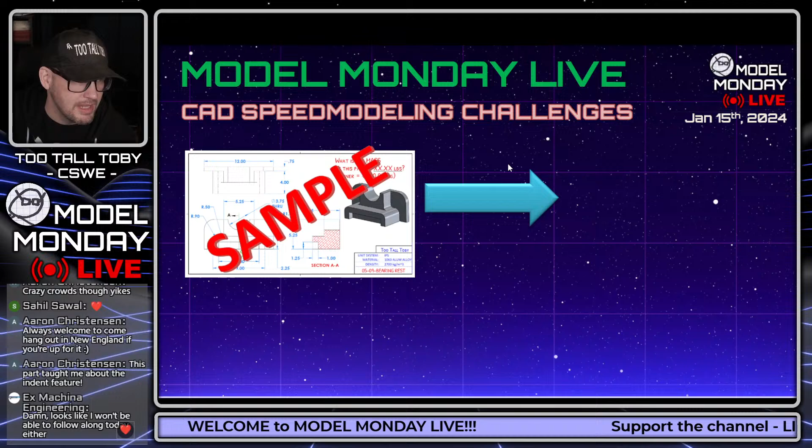So here we go, let's get into it. CAD speed modeling challenges: we're going to show you a 2D print, and we're going to challenge you to turn that 2D print into a 3D model. You're going to calculate the mass of that model, and enter that mass directly into the YouTube chat. You can use any CAD system you want - SolidWorks, Onshape, Alibre, IronCAD, any CAD system you want - to take this 2D print, turn it into a 3D model, and calculate the mass. I know that we're a little bit light today.

It's a holiday here in the United States, so we're a little bit light as far as number of live attendees for this live stream today. But the people who are here are heavy hitters. So if you're in the chat today and you're trying this one, be ready for some challenges, because we have some of the fastest people in the world in the chat with us here today.

So the basic rules are that you can use any CAD package, that you're going to use the specified precision, and the first correct answer in the chat will be declared the winner. Here are the unit systems that we use on Model Monday Live.

So if you're here for the first time, let us know. Sahil in the chat is saying, I use Siemens NX. Very nice, very nice. Welcome, using Siemens NX - it's great to see a little bit of an exotic CAD system in here. And let's get into it here.

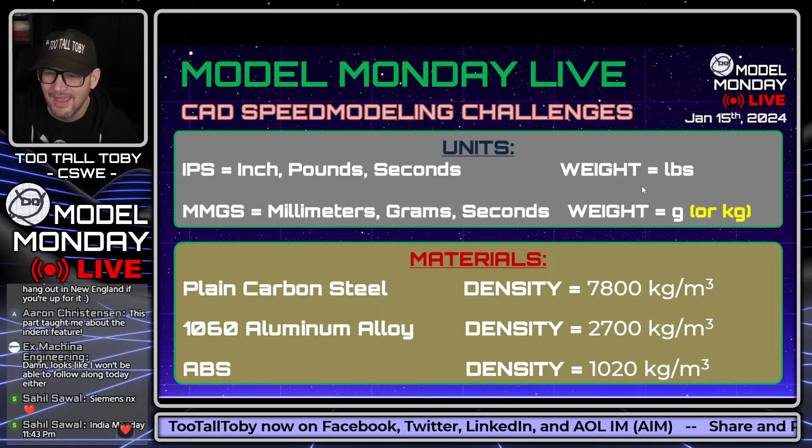Advanced rules: occasionally I'll make some mistakes, and the Ivan exploit is permitted. And Ricardo Jean is in the chat - welcome, Ricardo, perfect timing, we are about to get rolling here.

So here we go. This very first challenge is gonna go live as soon as I show the print. You are live, and you are challenged to turn this into a 3D model. Here we go, in 3, 2, 1, go. What is the mass of this part in XXX grams? The tolerance is plus or minus 1 gram. This part comes from the 2023 tournament - it was 23-T-04, corner T, a little corner part that you might use. This part you can see is in MMGS, made of 1060 alloy.

This is one that I think is a cool looking part. I don't think we've had this one as a challenge model or practice model in Model Monday Live yet. And so, as always, what we'll do with this model is make kind of a modified version, and then roll that out as a practice model as well, as a standalone video. But what is the mass of this part in XXX grams? That is your challenge today - try and take this 2D print and turn it into a 3D model.

I'll give you guys just another minute here to grab a screen capture of that. I'm going to take a sip of my delicious coffee. We actually ran out of our regular blended coffee today, so I'm drinking the backup stuff - not quite as delicious, but it gets the job done.

What is the mass of this part in XXX grams? The tolerance is plus or minus 1 gram. So give this a try - take a screen capture, put it over on your second monitor, start modeling this thing up. This is probably like a tier 3 on a scale of 1 through 10. This is like a tier 3 model here.

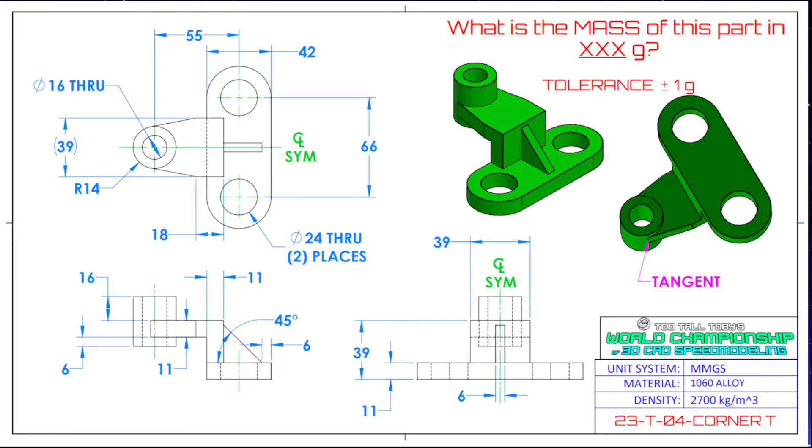We're going to flip back to the presentation here and keep on rolling, talking about what's going on in the world of TooTallToby. As I mentioned at the onset, the 2024 Spring Open is currently live for registration and qualification, and that window of opportunity will end in just about a week.

So if you go to TooTallToby.com and go to the section that says Tournaments, 2024 Spring Open, or TooTallToby.com/spring, you can see this is the page where you can register. There are lots and lots of people here who have submitted a qualifying run, looks like about 20 people. So what we're going to do is look at all of these runs and reach out to the top 16 people on this board.

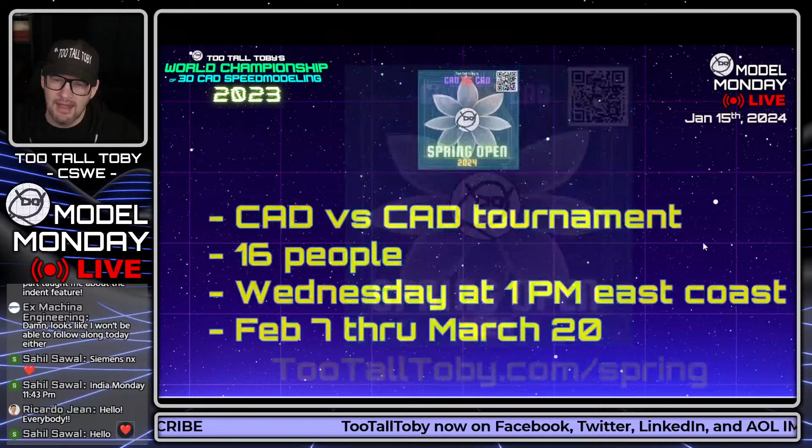We're going to say, hey, would you like to compete in the upcoming tournament, the Spring Open? The details here are that the tournament is going to be CAD versus CAD, 1 versus 1, same format that we use for the World Championship. It's going to be 16 people, running on Wednesdays at 1 p.m. East Coast, with tournament dates every Wednesday, February 7th through March 20th.

I think there's like one week where we skip in there, but the semifinals and finals are going to run on March 20th, and it's going to live stream at 1 p.m. on Wednesdays, East Coast time.

So if it turns out that we reach out to some of these people who qualified for the tournament and they say they actually can't do it on Wednesdays, or if we run into a scheduling conflict where they just can't do the tournament, then we're going to go on to the next people in the list.

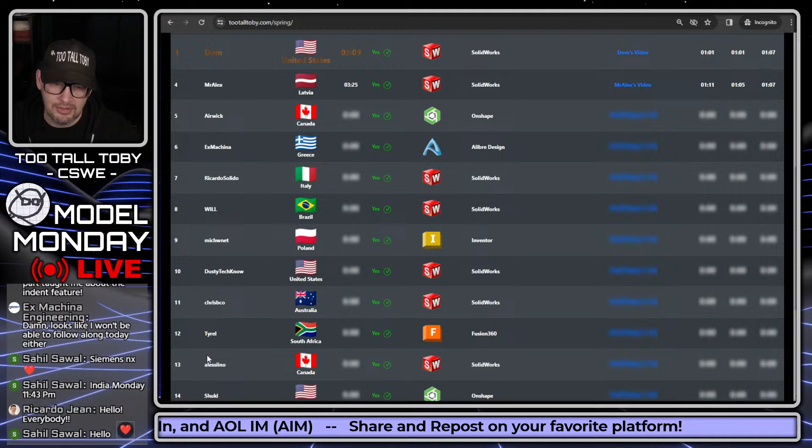So be sure to let us know what you think about these challenges, but let us know if you want to be a part of this tournament. The way you do that is you go through and model up these 3 parts, record yourself doing it. If you want to see a video of how to qualify, all the instructions are up top.

And if you want to see some of the other people running this thing, you could click on one of these videos, like Dom here. He's in 3rd place, did this using SolidWorks 2023. We can see that Dom was able to go through and model up these 3 parts. You can see there's a clock over here on the left, and he was able to go through and model all these parts.

Basically, you model the part and then you have to clearly show what the mass of that part is. Once you do that for all 3 models, you'll be qualified for this tournament. You'll be able to enter into this tournament and hopefully win this upcoming Spring Open.

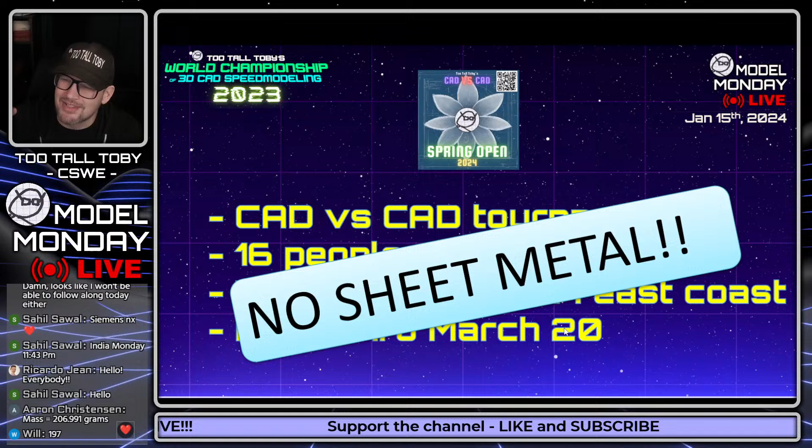So the difference between the Spring Open and the World Championship is that this one's only 16 people, while the World Championship is 32. This one takes place on Wednesdays at 1 p.m., it's a little bit of a shorter run, and we're going to have no sheet metal. As of just a few minutes ago in the chat, we're also going to have no assemblies or multi-body required. You could always use multi-body to bridge gaps on certain components if you want, but we're not going to have anything multi-material, multi-body assembly, nothing like that in the Spring Open. So it's all going to be parts.

So the Spring Open is the next CAD vs. CAD tournament. Very excited to be hosting this, and we're getting everything in order on our back end. We're really excited about all the people who have already qualified and submitted qualification registration for this tournament. It's going to be a good one for sure.

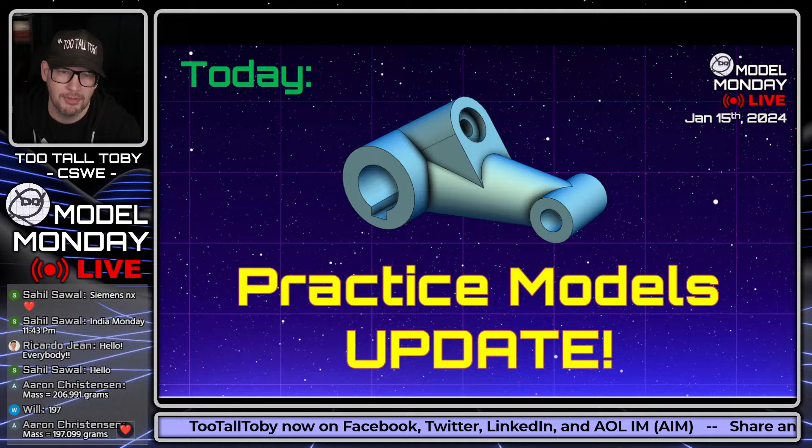We talked about this a little bit last week, but the idea of the practice models update is that using kind of the same technology that we use for the leaderboard runs, you can now go in and challenge yourself to complete a practice model.

So you'll see here that when you go to TooTallToby.com/practice models, there's a list of all of the practice models. You can go list view or grid view to filter this out. You can see the different levels of complexity: tier 1, tier 4, tier 3, tier 3, tier 3, tier 4, tier 4, on a scale of 1 to 10. That's what that tier scale is.

Basically, how many features it's going to take you to finish this model, and also is there anything really tricky, like you have to do the features in a certain order to get the correct answer.

So the models can be completed in any order you want. You don't have to start at the beginning and go to the end, but every time you finish one, you're going to earn 10 TTT cash, which you can use here in the general store. Kind of cool - you can use this to purchase NFTs or to purchase these PDF party packs. So you're going to earn 10 TTT cash every time you finish one of those practice models, and you're going to end up acquiring points essentially on the leaderboard.

And we can see here on the leaderboard, we've already got 4 people who have finished all 7 of these models: Smooth Slug, Jay Gomez 720, Phosphor, our Plasticity user, and Clemen Chen have all finished all 7 of the models available on that practice models challenge.

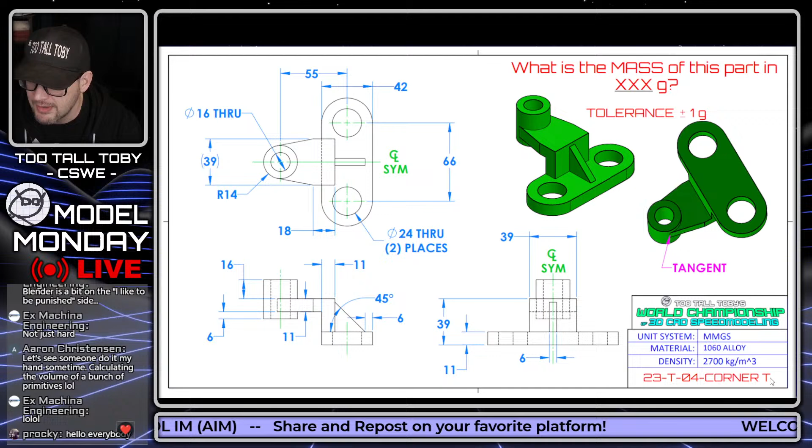So we are going to take a look here at this model. What's up, Procky? Welcome, thanks for joining us. 23T04 corner T. Let's take a look at the chat here and let's see what kind of answers came in.

I saw Victor K, the world champion of 3D CAD speed modeling, come in with the first answer, 197 grams. Aaron C coming in right behind him, 206.9 or 207 grams. Will coming in at 197. Aaron C revising to 197 - looks like maybe he missed something on there. Revised it, got it correct, same as these other guys. Probably it's correct.

That's it. Like I said, I know we're a little bit short today as far as live attendees, but looks like we got about 18 people watching, so maybe we're going to have some more participation in the next challenge. Holy smokes, we got a massive donation here from UDS.

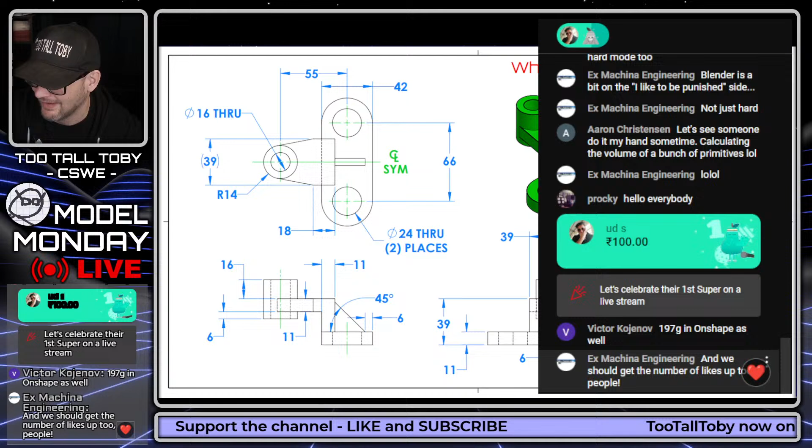Cool, all right, well let's go with the answer here for this challenge. The correct answer is 197. Very nice, so Victor K is going to earn that point. Congratulations to Victor K, 197 is correct. He was the first one to get that answer correct, so good job Victor K.

Adding to your tally from last week, Victor K earned 1 point last week as well. Now he's up to 2 points for the year as far as the Model Monday Live challenges go. Congratulations. Aaron, I think you won the other point last week, right? I don't have my leaderboard tally up here, it's still manual right now.

All right, here we go. Your second challenge begins as soon as I show the full screen, as soon as I show the print. In 3, 2, 1, go.

Here we go, a little bit of this is a deeper cut from the tournament this year. What is the mass of this part in X.XX pounds? I think this model was between Jihan Rafa and maybe Imants, I can't remember who was battling this one in the tournament. But this is a tricky one. It's in IPS, it's plain carbon steel. What is the mass in pounds? X.XX pounds, tolerance is plus or minus 0.01 pounds.

The thing that makes this tricky, I think, is the little half tombstone. It's called out with radius 0.625 in the view on the right in magenta. And then also, if you look in the right side view at the bottom of the page, there's a 5.25 dimension to the corners, the angled corners, and then there's also a 5.25 dimension to the center of those arcs. So that 5.25 - it's to the center of the arcs, it's to the center of the half-inch hole that's going through, and it's also to the corner of that triangular shape that's sticking out there. So a little bit tricky as far as those dimensions being the same and kind of on the same view - it's hard to tell what they're going to, but you don't have to worry about it because it's all going to the same thing. It's all 5.25. So give this a try.

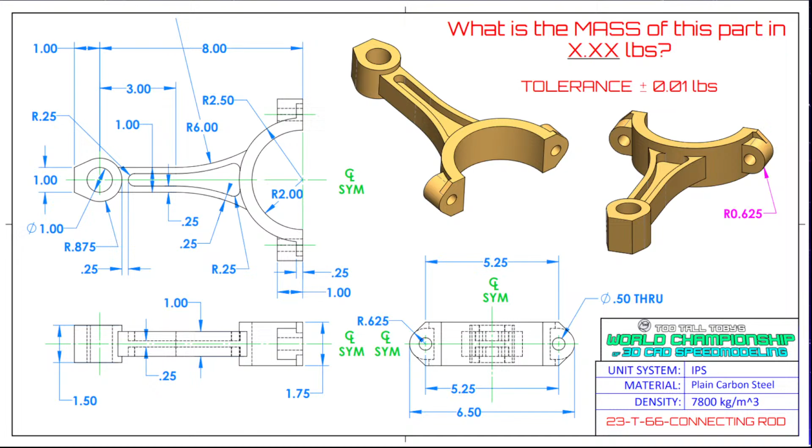So here we go, let's keep going. We're going to switch back to our full screen here, and let's get into some 3D CAD modeling using SolidWorks. Let's do this. This is going to be fun. So we're going to do a live tutorial, a live demo, a live solve using SolidWorks.

I'm going to use my very favorite build of SolidWorks, which is SolidWorks 2015. The reason I say this is my favorite build is because I think it's a nice balance between functionality - most of the functionality you need is in SolidWorks 2015 - performance, especially on modern hardware, it really is snappy, you're never waiting for the software, and stability, not too often that I'm crashing SolidWorks 2015. So those three things are all huge pluses for me.

I'm sure there are a few features that were added in newer builds of SolidWorks that I wish I had, like using wrap along a non-analytic surface. There's been several times where I've wished that I had that in 2015, or doing a sweep without needing to sketch a profile, which is convenient. It's not a deal breaker, but it is convenient. I wish I had that from time to time too, but overall you can get what you need out of SolidWorks 2015, and that's why I'm going to be using that one today.

And this is the challenge that we're going to be building here. So welcome to your SolidWorks live solve, the angled shelf. What is the mass of this part in XX.X kilograms? And let's get going here.

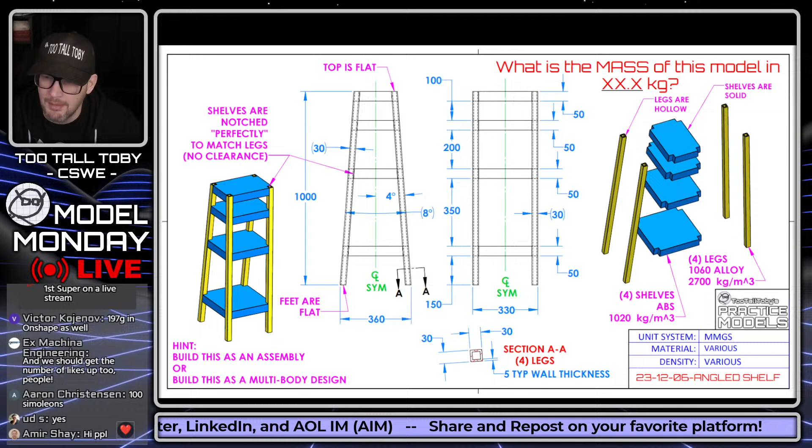We're just going to jump right into it. And the very first thing that I do whenever I'm starting a new challenge is I come up with a game plan. It's always a good first step. So what I do is I look at the overall model and I ask myself, how am I going to build this thing? In the real world, it's usually not just a single part, it's usually multiple parts working together.

And so you have to ask yourself, is this going to be modeled as an assembly, or is this going to be modeled as an individual part file with multiple bodies? And I think that for this model here, I would probably opt to do it as a multi-body part. And the reason why is because this part has a lot of interaction between the components.

Now, we could also do it as an assembly using in-context design. We could do a layout sketch, a master model layout sketch. Any technique is valid as long as you can come up with the correct answer - in this case, come up with the correct mass. But in this case, I think I'm just going to opt to do it as a multi-body part design.

And then the next question is, can we save ourselves any time by doing patterns? Is there anything we can do to save time in that regard? I think what I'm going to do is show off a little bit of patterning skills here, using a linear pattern with the variable pattern option, just because I really like that option. I've been using it in a lot of power moves lately, but it certainly is not necessary. We could also just sketch these shelves here.

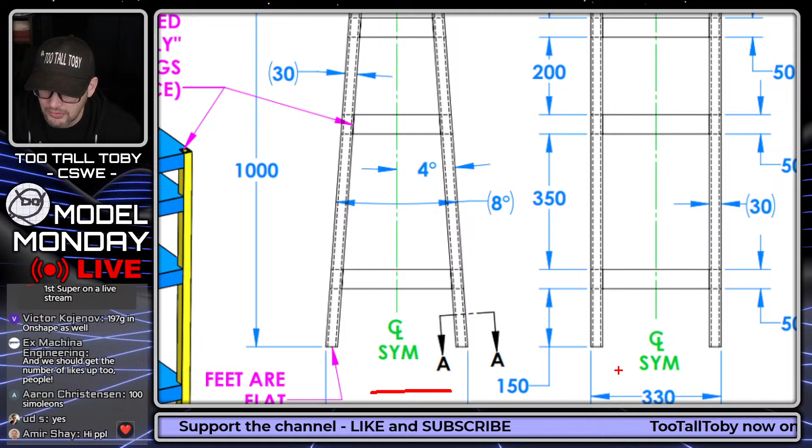So how would I model this thing? I think what I would probably do is start out by creating these legs here on the front view. Now the model is symmetric - it's symmetric in two directions, so it's symmetric here, it's symmetric here. So I think what I would start out doing is sketching or drawing up this leg here in the front view, and then mirroring it across that center line to give me the leg on both of those planes.

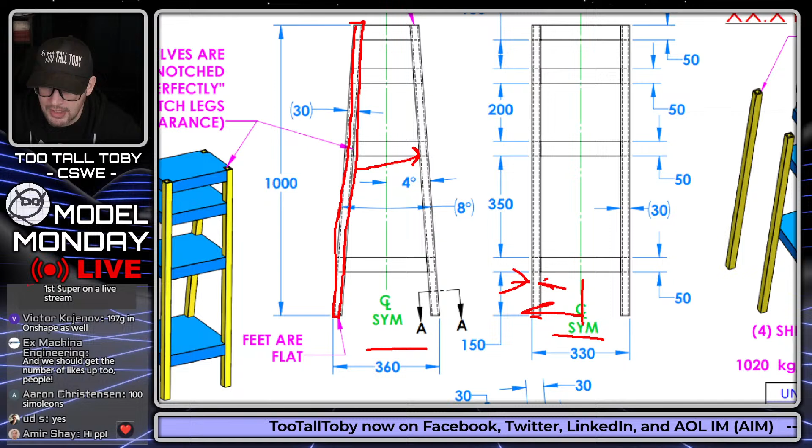And then what I think I would probably do here is either just extrude one of these legs to this depth, which is 30 millimeters, so this depth here, or I would take that sketch from the center plane and just extrude it out mid-plane at 330, and then create a second sketch here to cut those legs in half.

So to cut those legs and make them into four separate bodies, going from 2 bodies to 4 bodies—I think that's going to be the technique I'm going to use. But as always, when you start creating these models, you have to ask yourself, how am I going to build this thing? What's my game plan? How would I build these 4 legs? Would I just draw one leg at a time? If so, what's the sketch plane going to look like for that leg? That's certainly valid too. You could just draw one leg and mirror it. In fact, I think that's probably a little more intuitive.

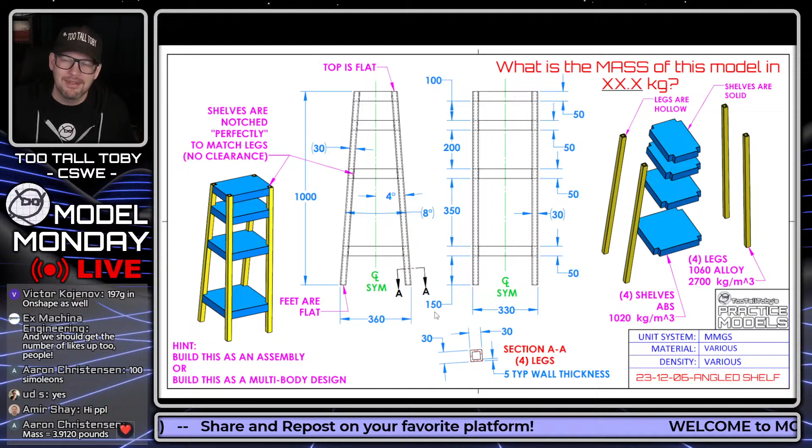So maybe that's where I'd start, just creating one leg. This is the whole thing—it's like a puzzle. You want to look at it, look at the instructions, which is your 2D drawing, and then once you look at those instructions, you want to start putting that thing together. So you look at the instructions, come up with a game plan, and then start putting the whole thing together.

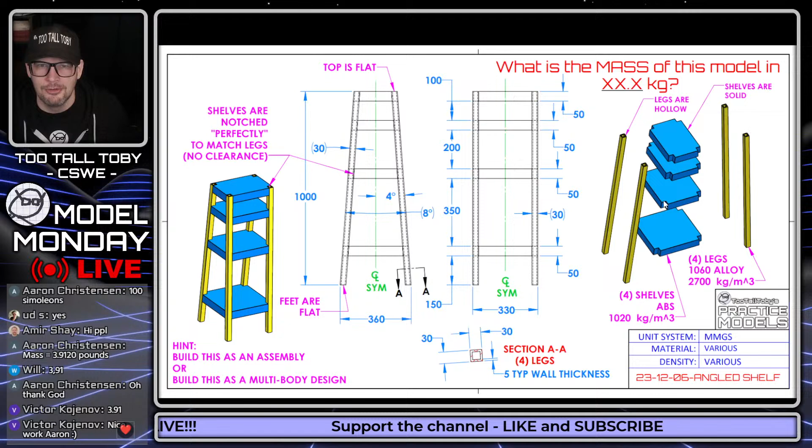What we always teach our students when doing 3D modeling is before you get started, you want to come up with a game plan. You want to ask yourself, how am I going to model each of these legs? How am I going to model the shelf? How am I going to model this little notch here in the shelf so it perfectly matches up with those 4 legs? I think in the case of this model, I'm going to use a single part file.

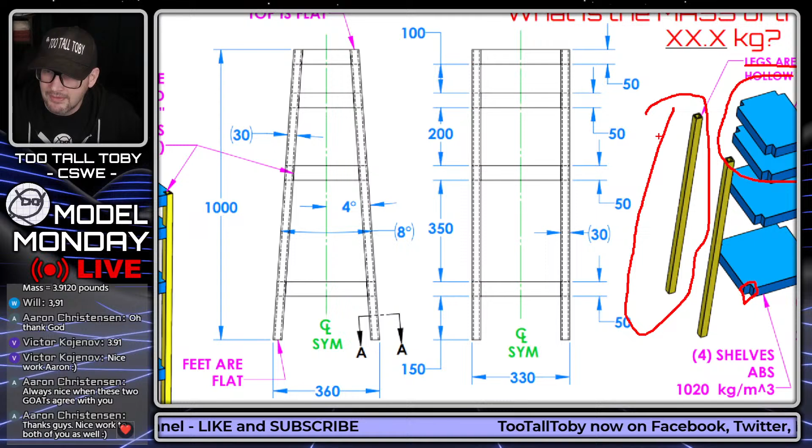I'm going to do what's called multi-body design. This leg here that I've circled, I'm going to create as my first body in this multi-body design. So I'm going to create a sketch here on the front plane that represents the shape of that leg, then extrude that sketch out to a depth of 30 millimeters. And I'm going to use the option for offset sketch plane to offset that sketch plane to 330, over 2—half of 330. That's going to give me my first leg.

Then I'll be able to do some mirroring with that leg—I'll mirror the leg over here, and mirror those 2 legs over here, and then I'll have all 4 of those legs. And then I think what I'm going to do is create a sketch of the shelf by just making a rectangle here at 50 millimeters high. And then I'm going to do a really cool pattern.

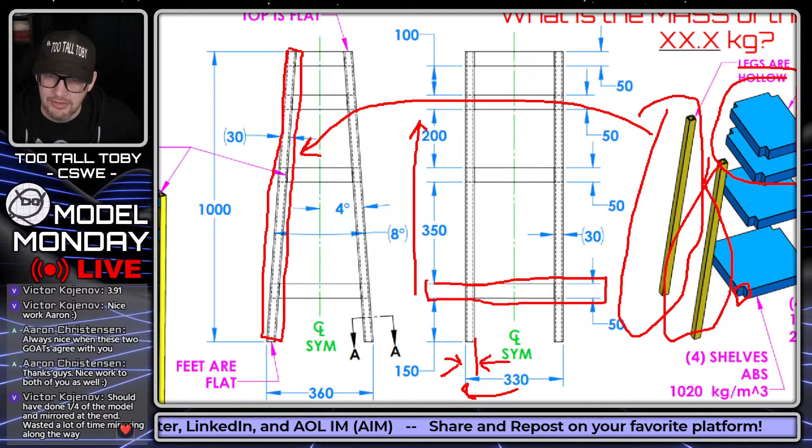This pattern is called a linear pattern using the variable distance option. So a linear pattern with the variable distance option, and I'm going to say I want this first instance to be 350, the second instance to be 200, and the third instance to be 100. I think for each of them, I'll have to add the 50 millimeter for the shelf thickness. That should get me pretty close to the end of the model.

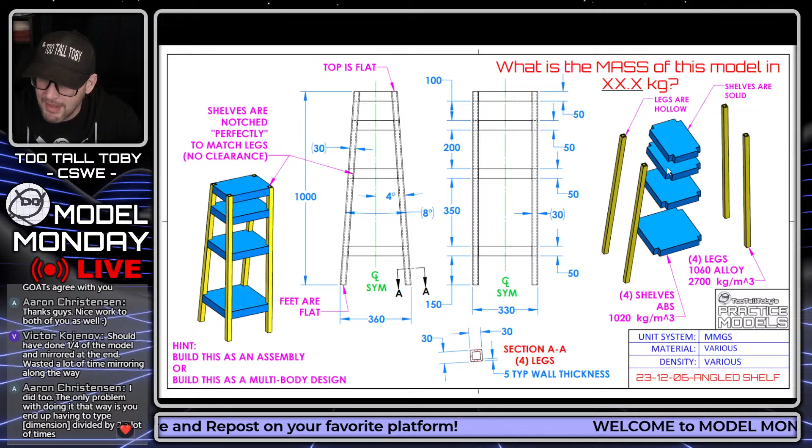Then I'm going to come up with the challenge of, well, how am I going to notch out these corners? How do I notch out these corners here? And I think what I'm going to use for that is actually going to be a little bit of surfacing—mix it up a little and use a little surfacing. So I'm going to make a little surface there on that leg.

I'm going to extend that surface, and then I can use that surface to do a cut. I can cut through those shelves using that surface. Maybe I'll make a mirror of that surface as well so that I can get all 4 of them at once and then make a cut of that shelf in the corner.

There's lots of different ways you can do this. I know in the chat, Aaron was saying he did it using an indent command in the corners. You could maybe make it as an assembly. Lots of different ways to do this, but the main thing you want to take away is to always come up with a game plan before you get started with your model.

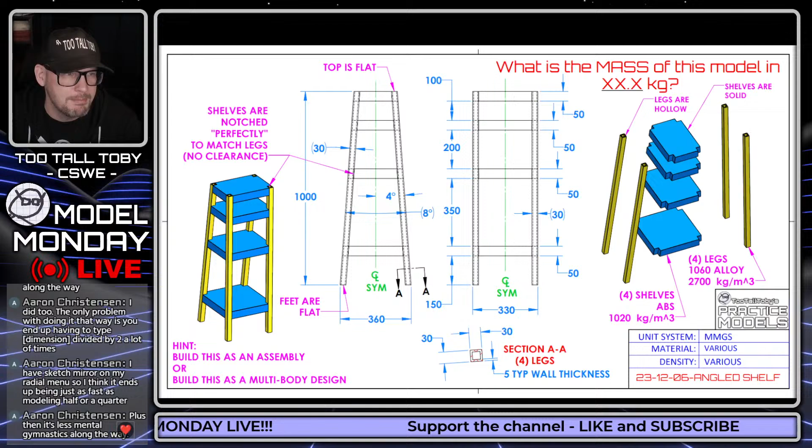So now that I've got that game plan, let's go into the Windows snipping tool. I'm going to grab a screen capture of this model and move it over onto my second monitor, and begin modeling this. As you guys know, when I start modeling I get really zoned in, so I'm probably not going to react to the chat too much. But if anything really important comes up, I'll keep an eye on it so I can answer your questions.

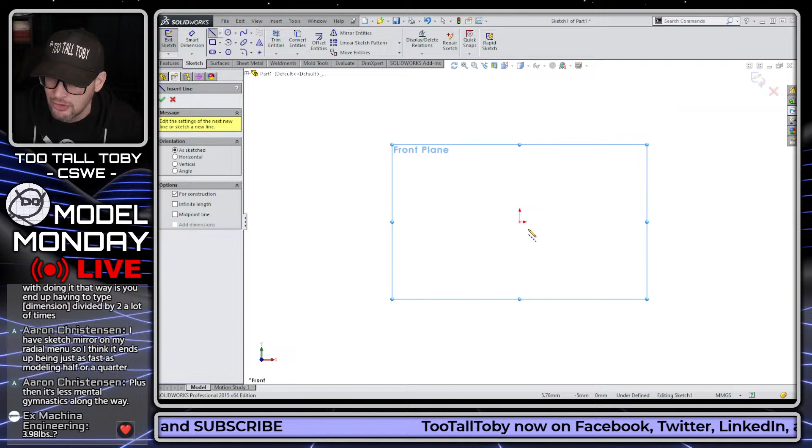So let's go in here. Let's start a new part in SolidWorks 2015, my favorite build of SolidWorks. I'm going to make this a part using millimeters. To stick to the game plan, I'm going to start on the front plane, begin a sketch, and create a sketch here with a center line. That center line is going to be used to drive the location of this set of angled lines here.

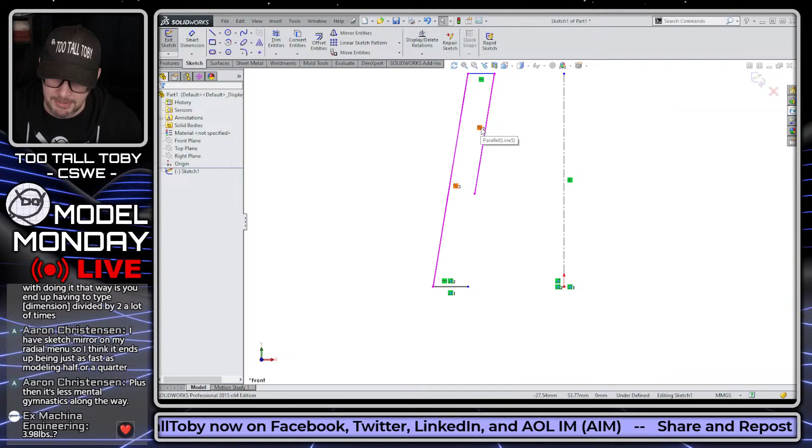Now, one thing you can do when sketching in SolidWorks, if for some reason you don't pick up on the parallel relationship - you can see the relationship showing up in yellow, meaning it'll add the parallel relationship - I'm going to delete that line and recreate a line here. If for some reason you ever don't get that relationship to show up, you can just hold your mouse over that other line for a moment, then move back over, and that'll reactivate the relationship to that line. So if you ever find yourself in that spot, that's a pro tip to reactivate that automatic relationship capability.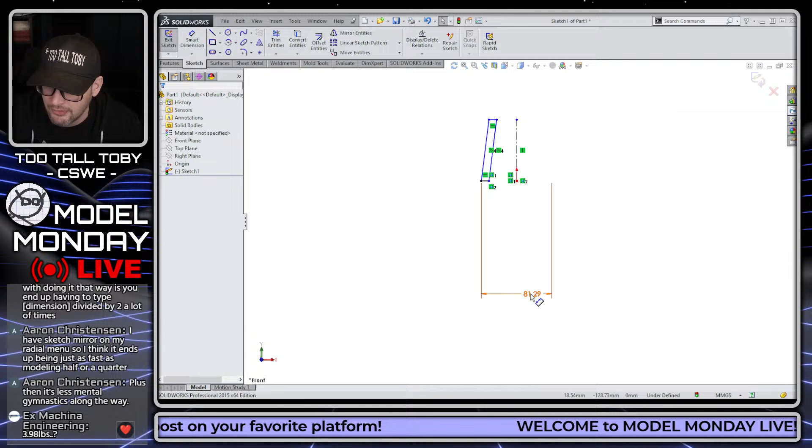Now this is going to have a distance to the outside of 360. The way I'm doing that is using what's called a doubled dimension in SolidWorks. I pick this point, pick this line, come across, and make that 360. Then SolidWorks does what's called auto scaling. A moment ago, before I did that, that dimension was 81, and it almost looks like the screen doesn't change at all when I change it to 360. But that's because when you put in your very first dimension, SolidWorks automatically upscales the entire sketch to match whatever value that first dimension is. So auto scaling on that first dimension - very cool functionality in SolidWorks 2015.

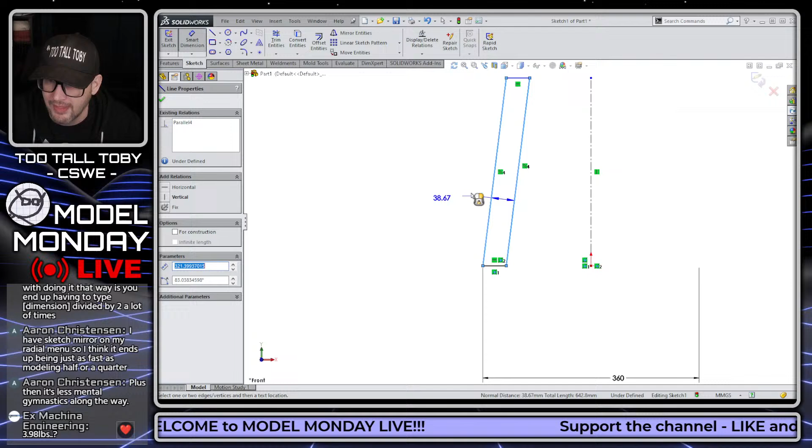Now what I'm going to do after this is create another dimension here, which represents the width of this thing. This is going to be on an angle here, and that width is going to be at 30 millimeters. Then there's going to be a dimension here representing the height, which will be 1 meter. Finally, I'm going to indicate an angle dimension here, from here to this line and then crossing over that line, supposed to be 8 degrees.

So the way we get those double dimensions when doing an angle is you hold shift. When it's a linear dimension, it happens automatically, but when it's an angle dimension, you have to hold shift. So we're going to hold shift there and make that a dimension of 8 degrees. And there we go - that sketch is all black, which means it's fully defined, fully constrained.

Now we're ready to go into an extrude command. This thing is going to have a depth of 30 millimeters, but it's not going to be 30 millimeters from the front plane - it's going to be 30 millimeters offset. So I'll use this flyout menu here to make this offset.

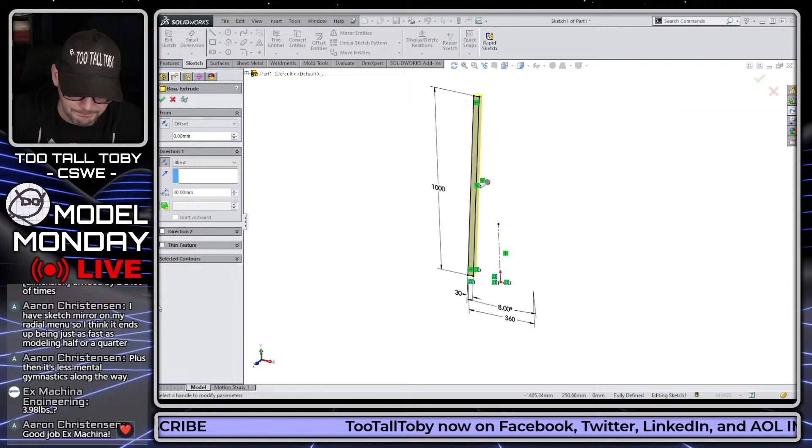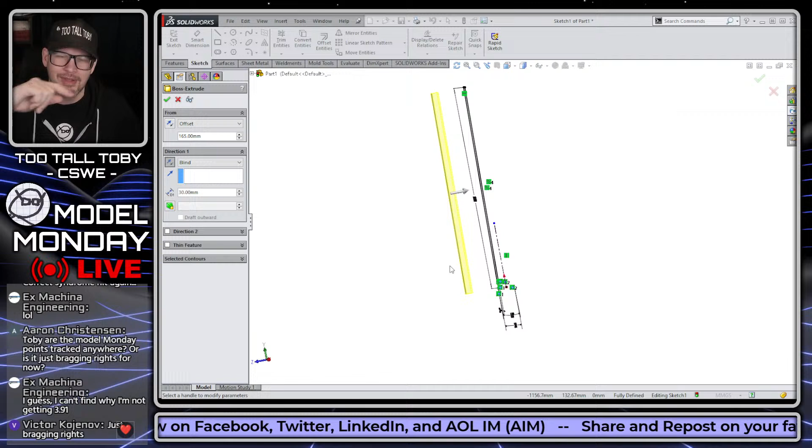That offset distance there from the flyout menu, offset, that offset distance is going to be 330 over 2. And then we can examine the extrusion direction here, flip it if we need to, because it's going to be 330 over 2 and then going inward. Make sure that the direction of that extrusion is correct. And there we go, now we've got that leg extruded in the correct direction.

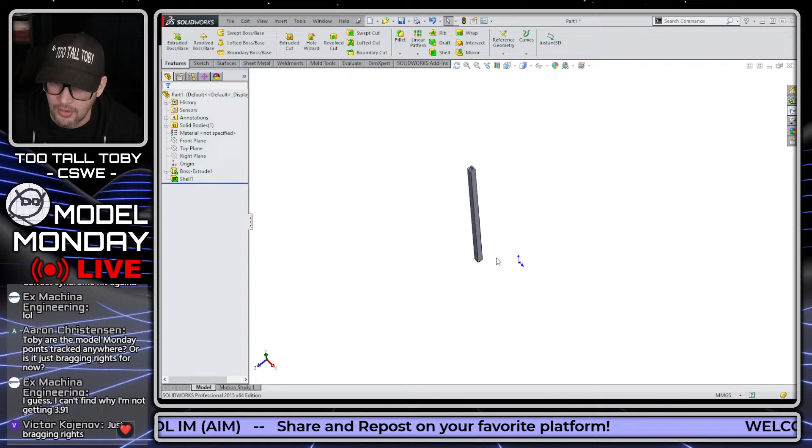Now this leg is supposed to be hollow, so I think the next thing I'll do is drive a shell in here that's going to have a 5 millimeter wall thickness, and that shell is going to be applied on this face and on this face here. So we hit the green check mark, and there we go. That gives us our first feature there in the tree, that leg.

Now I'm just going to show the front and the right plane here so you can see what our plan is. Our plan next is to mirror that leg about both of these planes. We're not going to be doing this as a mirror feature, where you go in and choose a feature to mirror. We're going to go down here to bodies to mirror. Right now the selection box is on features to mirror.

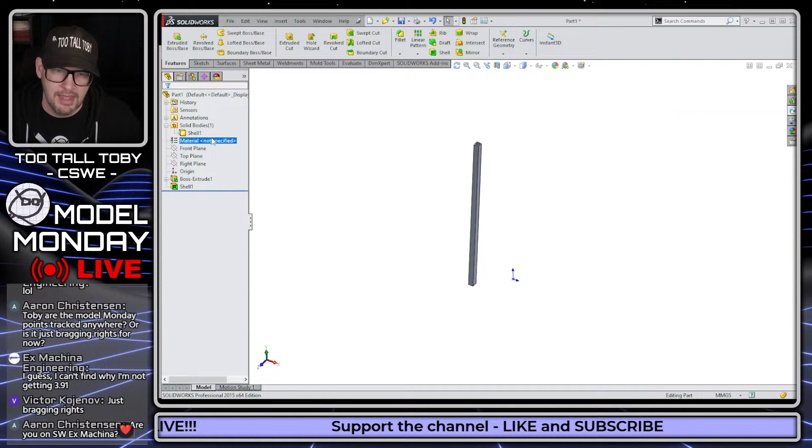Well, here's a pretty cool thing that I learned, believe it or not, from Aaron C. in the chat, kind of through osmosis from a different conversation about a custom macro he was working on. Check this out: if you go into the solid bodies folder in SolidWorks and pre-select a body, then pre-select a plane, when you go to the mirror command, SolidWorks will automatically use the bodies to mirror field in that box. Normally when you go into mirror, you choose features to mirror, faces to mirror, or bodies to mirror. But if you pick this body, hold control, pick a plane, let go of control, then choose mirror, SolidWorks automatically does bodies to mirror.

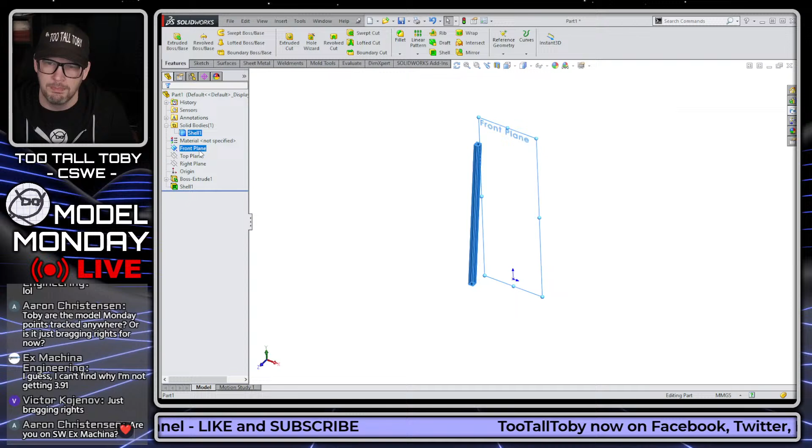And if you take that one step further and use the power move I posted a couple weeks ago, where you modify the context menu so mirror is right here, then you can pick the body, hold control, pick the plane, let go of control, mirror, and then just hit the green check mark and you'll have your mirrored body. So we can do it again: hold control, pick these two bodies, pick the right plane, let go of control, mirror, hit the green check mark, and boom, we're done with those mirrors.

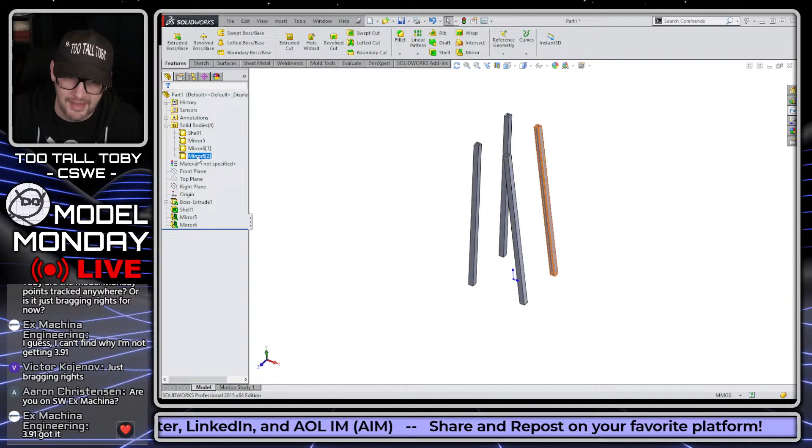So it's all really out of the box functionality. The only thing I really customized was modifying this toolbar. But even without that toolbar, you could just click mirror and then right mouse button to finish. It keeps going merge solids for some reason on the first one because it's not multi-body yet, but once it's multi-body it'll just happen automatically. So we pick these two, pick mirror, come out here and right click, boom, done with mirroring those bodies. That's something new I discovered and have been using a lot lately: pre-selecting a body from the tree and then choosing mirror, which automates selecting the bodies to mirror. Nice little extra pro move there in this example.

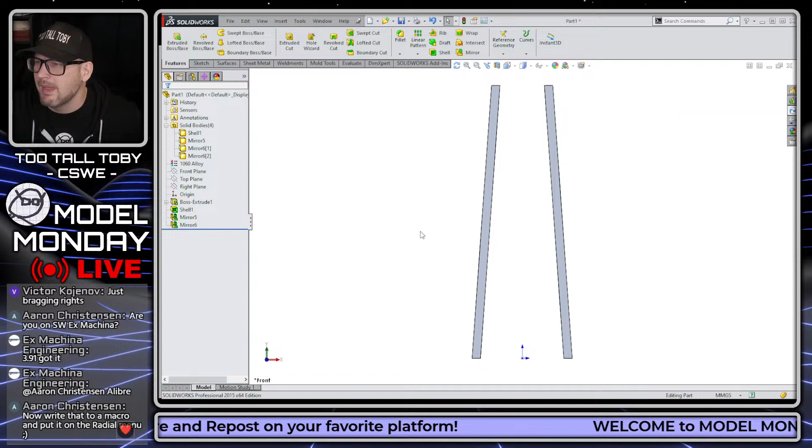All right, all of these legs are made from the same material, 1060 alloy, so I'm just going to make the whole part out of 1060 alloy. So here we go, 1060 alloy for that whole part. Then I'll make the shelves out of a different material.

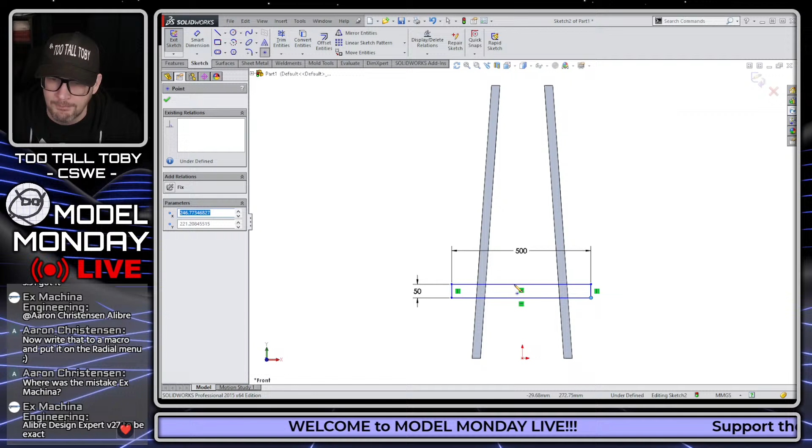Now for the shelves, I'm going to go to the front plane, begin a sketch, and orient my view. The way I originally did this was I created the shelves individually using rectangles, like this. I made this 50, enter, let's say 300, just enough that it'll be sticking off the ends here—let's make it 500. I did it like this, and then I included a vertical point here so I could take this point and make it vertical. Then I used geometry window select, held control, drag and drop, repeated drag and drop, and repeated drag and drop again.

Make all these points here vertical, and then add the dimensions between them. The nice thing about that is that it makes it pretty easy to align the top shelf here to this top segment. But I'm going to show you today a different way of doing this.

So that's totally valid. You could totally do it that way and then use the remaining steps that I'm about to show you. But a different way is you could create the dimension for the first shelf here from the bottom. So this is going to have a dimension here of 150. We'll go from the origin there to that first shelf, and make that 150.

And then we can take that geometry and extrude that. We're going to extrude that, and make that up to surface and up to surface. So I'll double click this face here. So there it goes, up to face. And then for direction 2, I'm going to choose up to surface as well.

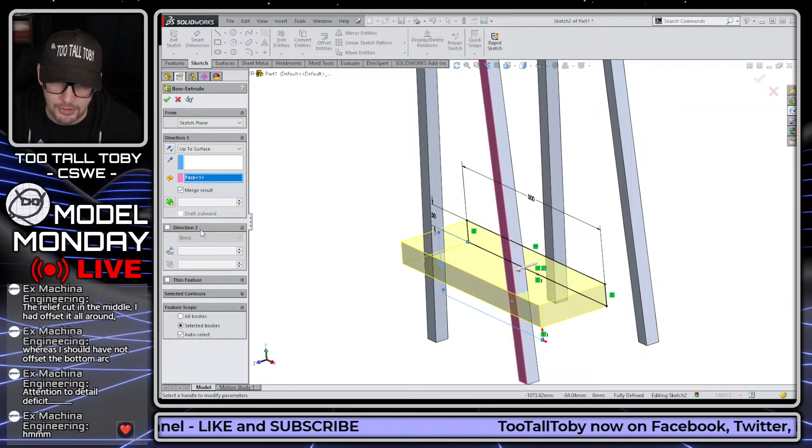And currently that is merged. That's not what we want. So I'm going to edit this feature here, and say, don't merge the results.

Now, here's another kind of cool trick that you can do if you're ever working in SolidWorks on multi-body. You can see here that when I'm in the sketch and I go to take that sketch and extrude it out, the default behavior is that merge results is selected. When you're doing multi-body or a single body, it always defaults to merge result.

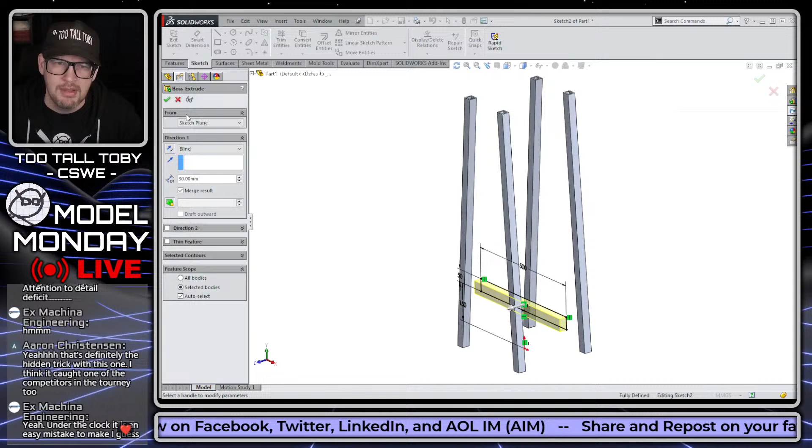Well, the quick way to get that to not be selected is you can go up here into weldments, and click this button here that says weldment. So let me get out of the sketch, and now I'm just going to click this button. I'm on the weldments toolbar here. That's it, I'm just going to click the button. It adds a new feature in the tree.

It changes this to be a cut list, which means that it'll group together items that are identical. But what it also does is now when I go to this sketch and go to extrude it, merge result is not selected by default.

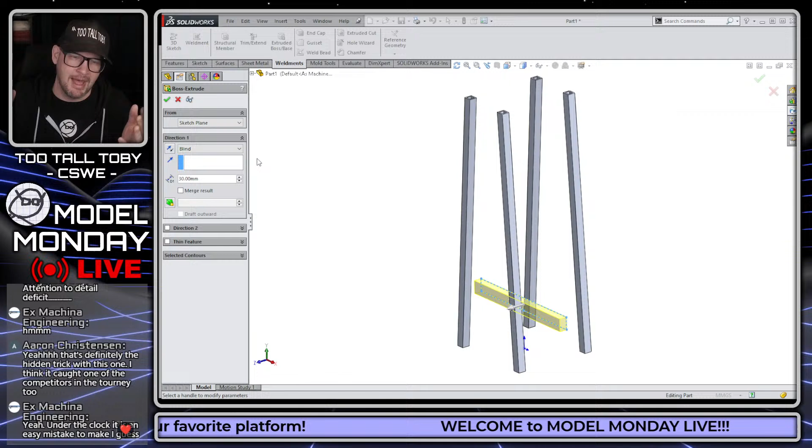So if you know that you're working in a model that's multi-body, it doesn't have to be a weldment. It could be a plastic enclosure for a remote control with a bunch of buttons, and you're designing it all in one part using multi-body. If you just click the weldments command and add that weldment feature at the top of the tree, then merge results will no longer be selected by default, and that can be a nice time saver.

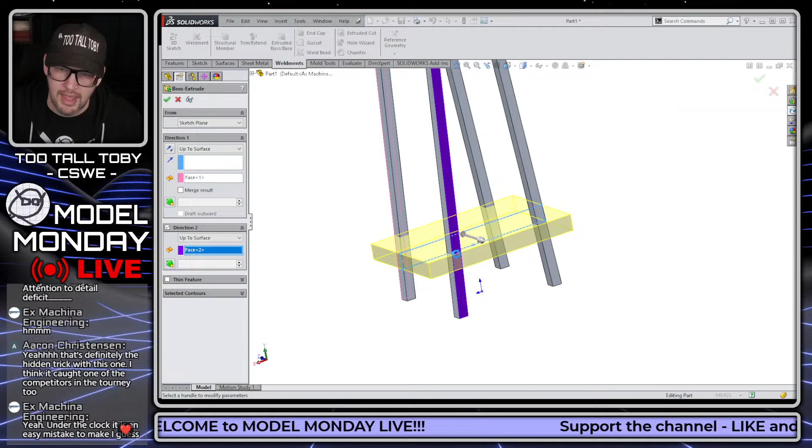So now we'll go extrude. We'll double click on this face here so that we go up to that face. For direction 2, we choose up to surface, and we're going to click on this face back here for direction 2. And there we go. We hit the check mark, and now that is not a merged result.

And this shelf is going to be made out of a different material. This is going to be made out of ABS. So I'm going to go to that shelf, right mouse button on the body, choose material, and change that to ABS.

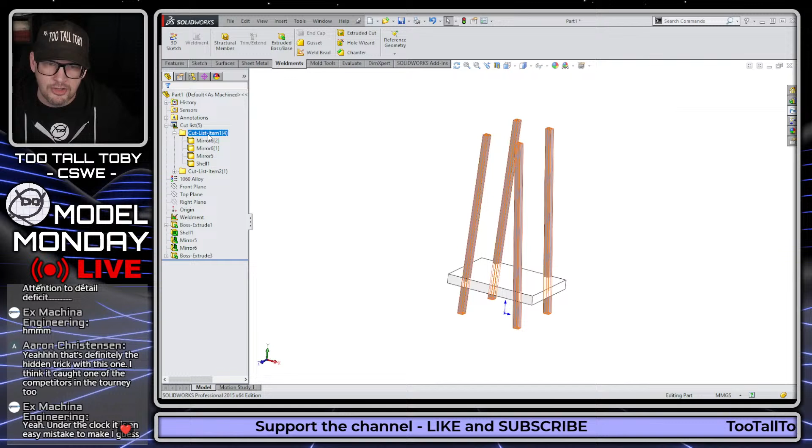And so now the way these are listed is a little bit different. These 4 are identical bodies, all 4 of them are identical, so it's one item, one drawing, one SKU with a quantity of 4. And then this one has a different SKU, and has its own material, so the material is listed down below. These bodies here are all using the material of the part. This body here is using a different material, this ABS.

And so now I'm going to take that body, and choose to create a linear pattern from that body or from that feature. So I go linear pattern here, and I'm going to say that the linear pattern is going to use this dimension to drive the direction of the pattern. This is just something kind of cool that you can do with linear patterns - you can use a dimension to drive the direction of the pattern.

And then for the spacing, I'm going to say that spacing is going to be 350. So there's the spacing of that pattern. There's 4 instances of that pattern. And that looks okay.

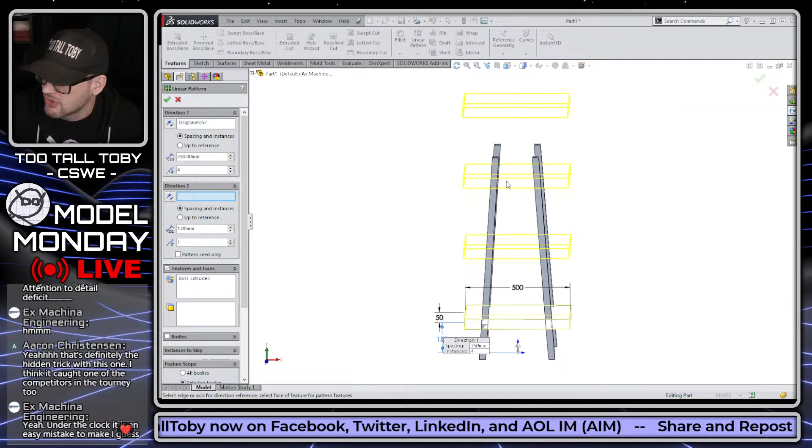The first one looks good, but the remaining shelf is supposed to be 200, and then the final shelf is supposed to be 100 for the spacing. So what I'm going to do is go down to the very bottom of the linear pattern command, where there's an option for instances to vary, and I'll choose that option.

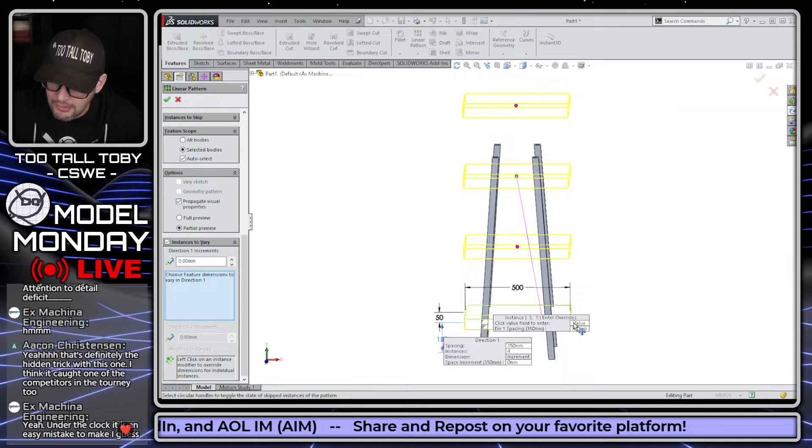For each of these instances, I can click on this little magenta dot and say modify instance. So this one is going to have a spacing of not 350, but really it tells you what the total calculation is, so it's like 350 plus 350 gets you to 700. So it's going to be 350 plus 200 to get me to that instance.

I'll do the same thing here, modify instance, and this one is going to be 350 plus 200 plus 100. Actually, I needed to add that extra 50 in there, so we'll modify this instance and make that plus 50, or 600. Then we'll modify this instance, and this one is going to be plus 100, so this is going to be 750.

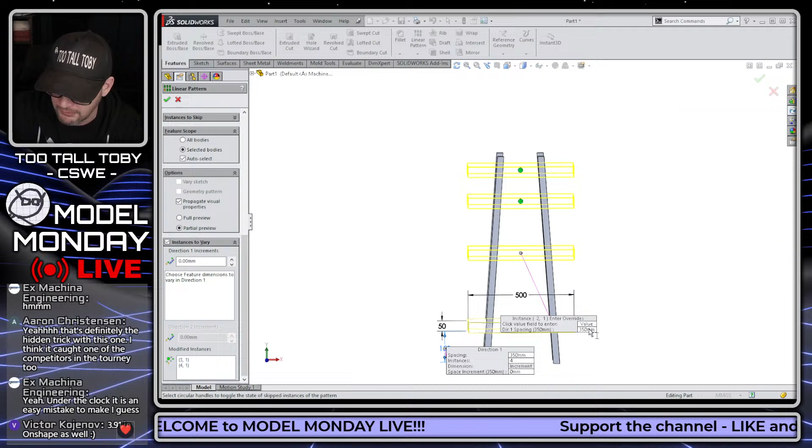750. Oh, I guess actually this first distance here was wrong also, right? Because it's 350 plus 50. So it's fine, this is going to be plus 50 as well, so 350 plus 50, so 400. This one is going to be 650. And then this one, I'm just adding the 50 here, make that one 800.

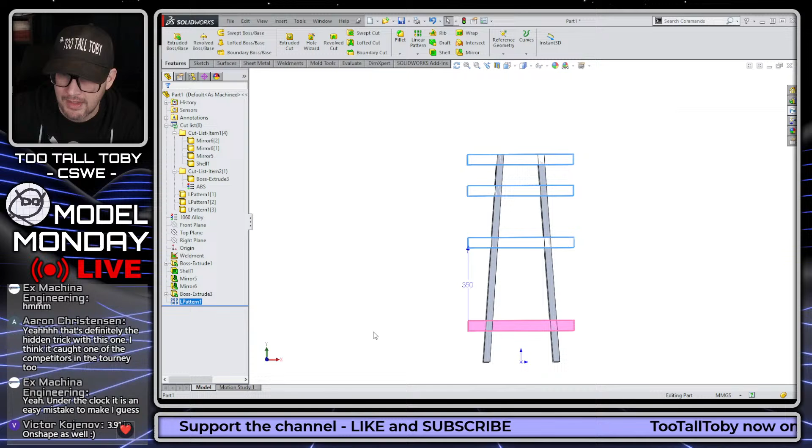There we go, so that gives us the spacing using a different technique. When we do the linear pattern using the modified spacing option, we can get that same spacing. This seems to me like it's a little bit cumbersome.

You saw there as I was going through, I was doing some extra steps that I probably would not have done in the actual live model. I think I would have just used the technique I showed you initially, but this is meant to be a tutorial, a live solve, and I wanted to show you some other functionality.

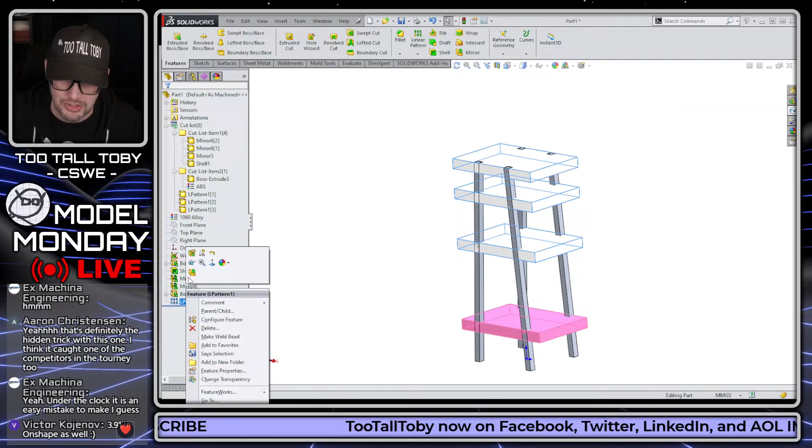To date, when we've talked about this option of modify instances, what we've really talked about is modifying the width of those shelves at the higher level, modifying a dimension from the sketch. But you can also modify these instances and change the spacing of the linear pattern, and that's really what I wanted to show off in today's demonstration.

So now we get to the final phase of this design. For me, I think what I'm going to do here is use a surface command to create the geometry that I can use to cut these shelves. That surface command is something I'm very comfortable using.

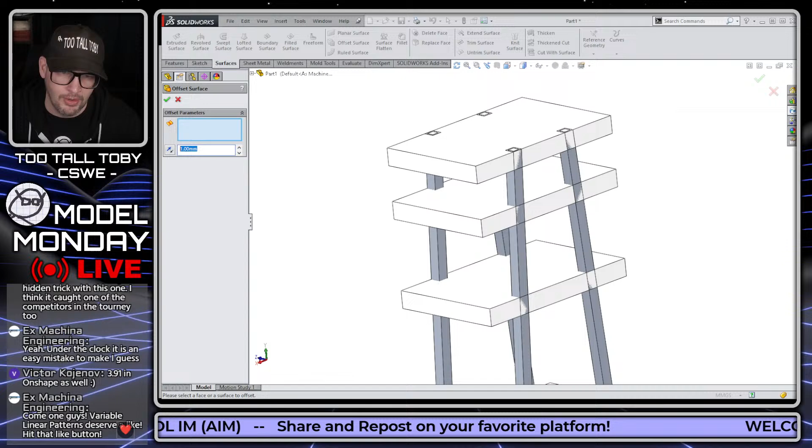If you're not using surfacing a lot, this might be a little too exotic for you. But the way I would do it is go to surfaces and say offset surface, and I'm going to offset this surface at 0. What I'm going to offset is this face here on the back of that leg and this face here on the inside of that leg. Once I offset those two faces, I can hit the green check mark.

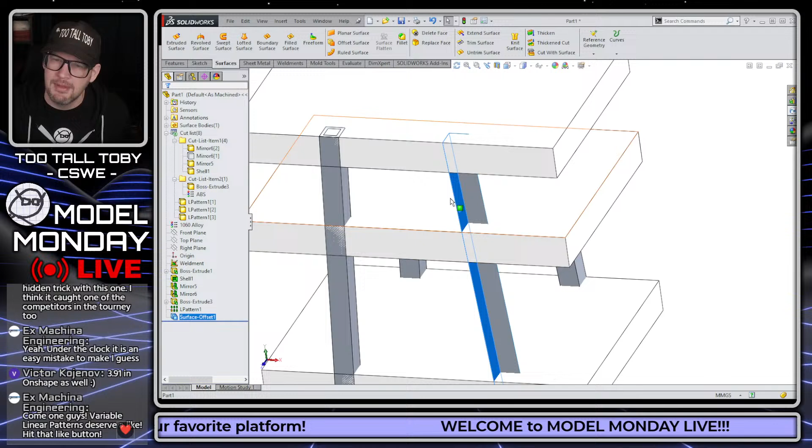I'm going to hide this body here. What I'm left with is a surface here and a surface here that I can use to cut. The problem is that this surface isn't long enough to do that cut.

So I need to do what's called a surface extend. I would do an extend surface here and bring this out, say 100, 150 millimeters, whatever I need to get that surface out far enough, maybe even 200 millimeters, something like that. Now that I've got that surface extended out, I've got enough room on that surface to cut these shelves.

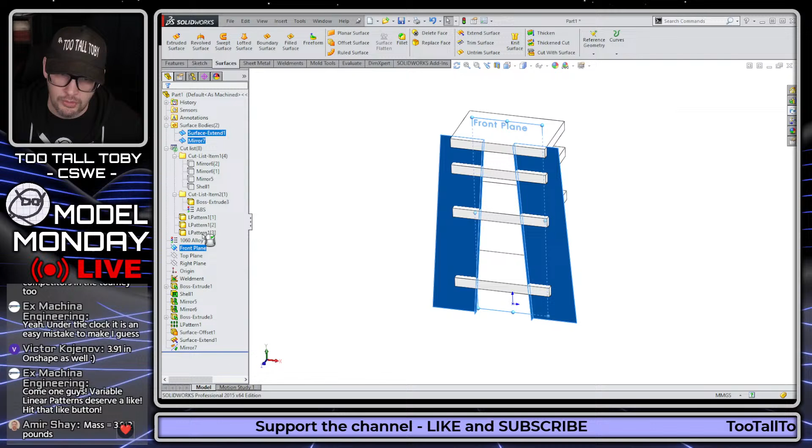So what I would do here is probably hide these remaining legs to make it a little easier to see. I'd use the trick we talked about earlier: pick the body from the tree, hold control, pick the plane, let go of control, mirror, right mouse button to finish. Then pick the two surface bodies, pick the front plane here, let go of control, mirror, and right mouse button to finish that.

Now I can jump into the command cut with surface. So insert, cut with surface. Then you pick your surface that you're going to be cutting with, and then you pick the body or bodies that you're going to be cutting through. I'm going to be cutting through these bodies here.

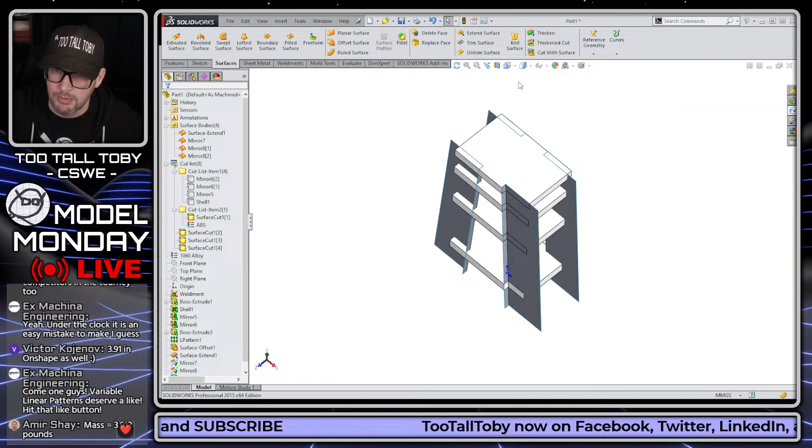Now I've removed that corner, and I can just repeat. Cut with surface, I'm going to pick this surface here. Usually if you do auto select, it's actually based on hide/show visibility. So if I hit the green check mark here, it'll probably only cut these and not cut the leg that was there. So that leg is probably still there.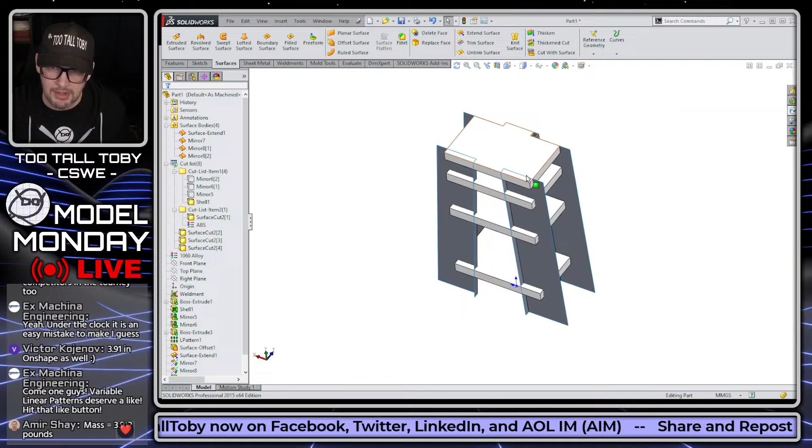Yep, I can see it's still there in the preview. So it's usually just based on hide/show - if it's shown and it's interfering with that surface, then that body will be selected. So instead of needing to pick these 1, 2, 3, 4 bodies, what I could do is say cut with surface, and then say auto select. Since these 4 bodies here are shown, and since they're being intersected by that surface, they're automatically selected.

Now, the final thing I'm going to do here is pick all these surface bodies and use the command insert, features, delete bodies, delete/keep bodies. But the shortcut is if you pick a body from the body folder and press delete, then those bodies are selected and a new feature is created at the bottom of the tree called delete body, or body delete/keep. So now those bodies are gone.

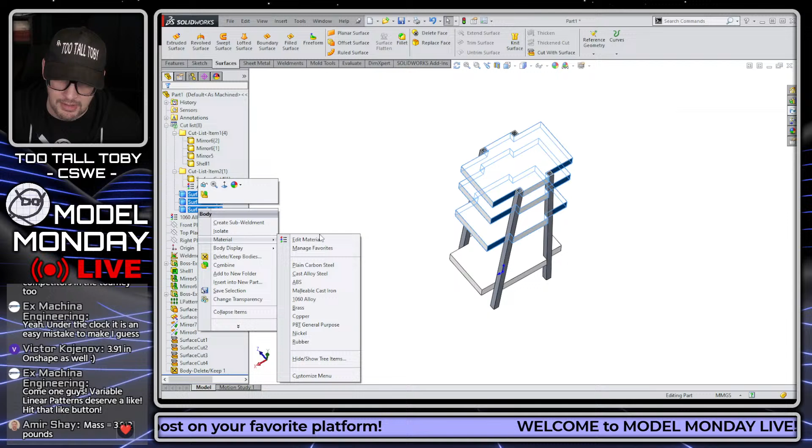Now I can bring back these bodies here. These guys here didn't get the custom material, so let's make sure they all have ABS as well. So ABS, ABS, ABS - all 4 of the shelves here have ABS, and the legs have that 1060.

Now the final thing I need to do is just clean up the shelves there on the outside, because they're obviously sticking out too far. Although I kind of like that design more for the shelves - I think I would actually prefer something like this in my living room.

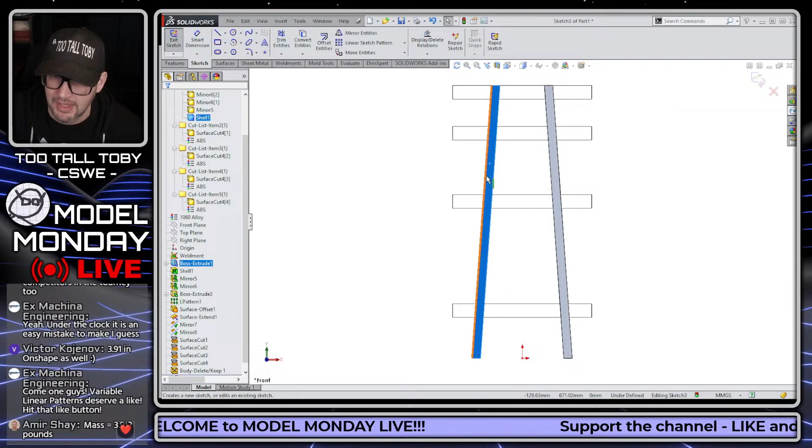But what we could do for that is begin a sketch, convert entity - really we could convert up here too, but it's fine. Convert entity, convert entity. So I just did a hold control and picked all 4 of them, bringing these 2 lines together to close that thing off.

And then we could do an extrude cut. So S key, extrude cut, right mouse button, through all. And then we're going to do flip side to cut, so instead of cutting to the inside, it's going to cut to the outside. Once again, our feature scope here says which bodies are going to be affected by this.

We can do auto select because the shelves are shown and only the shelves are going to be affected - the legs are not going to be affected by this cut extrude. So when we hit the green check mark, we see that only the shelves were affected, the legs were not. So now at this point, we can do a control Q to rebuild.

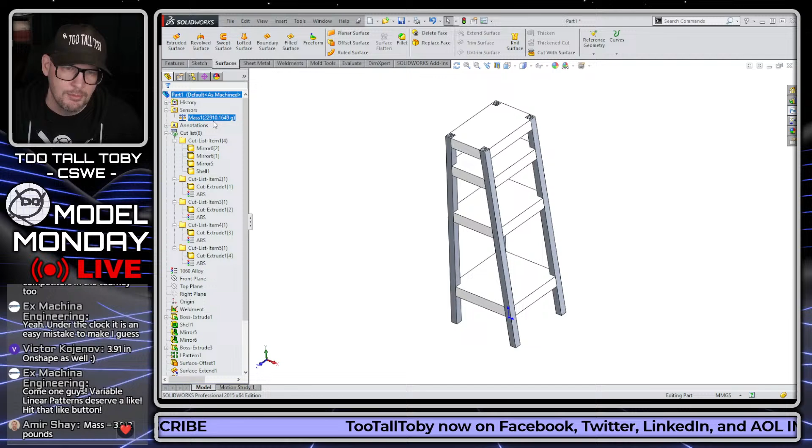If we had our template set up with a sensor, we could just look at the sensor, but if not, we can add a new sensor, or go to mass properties. Either way, we can see that the mass of this thing is 22.91 kilograms. Let's see if that is correct - and that is correct, 22.9 kilograms.

So we did it - we modeled this thing up using multi-body design in SolidWorks.

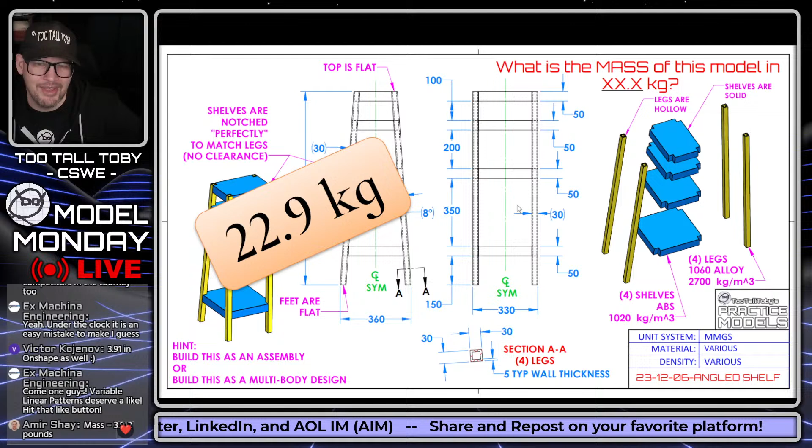And that is our live solve. Let's move on now in this presentation. Just going to take a look here at the chat, see if anything came up.

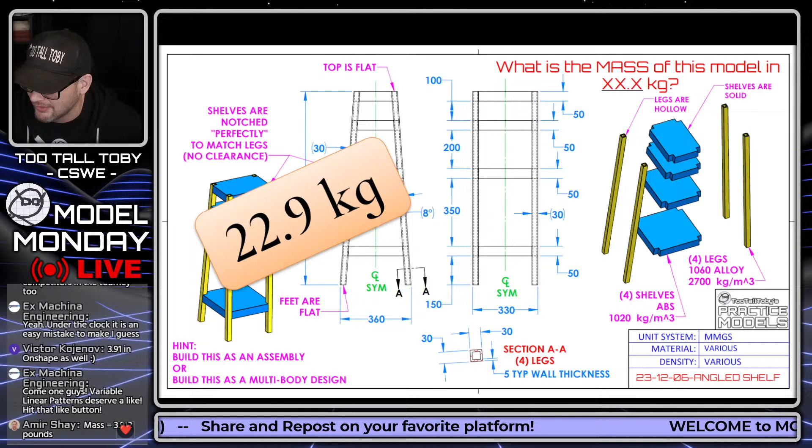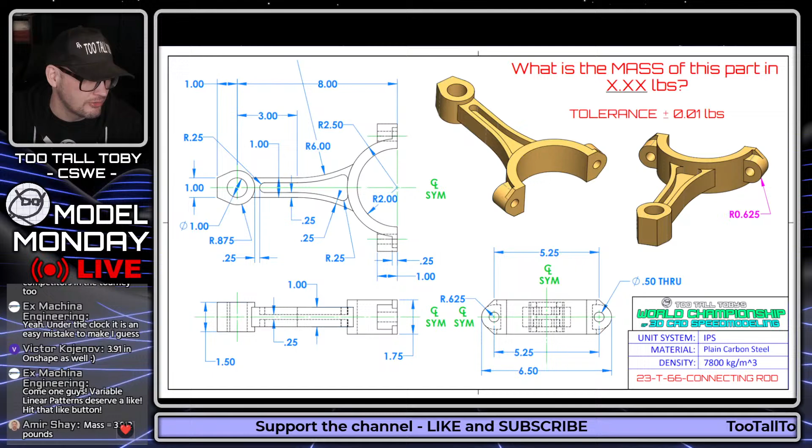So it looks like Amir S comes up with 3.91 pounds. Will, right behind him, 3.91 pounds. Amir says, oh thank God, got the same answer as Will from Brazil. Victor K coming in at 3.91, saying nice work Amir. Yes indeed, very nice work.

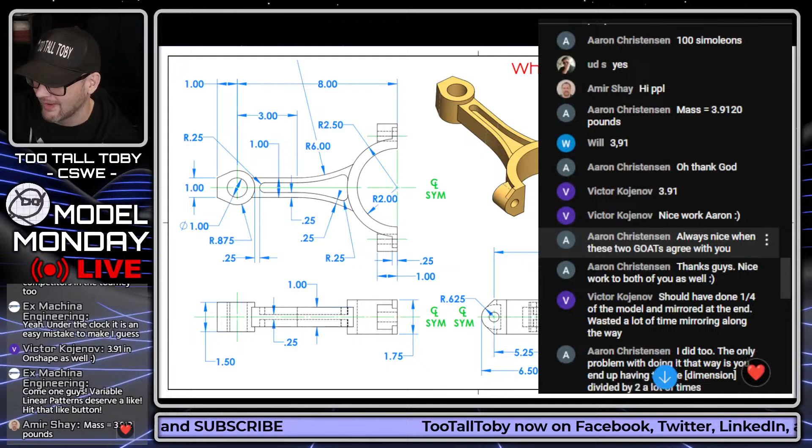Ex Machina Engineering, 3.98 pounds, very nice here using Alibre. Very, very nice. Ex Machina saying, can't find why I'm not getting 3.9. Well, 3.9 when he found it. Got it, very nice Ex Machina.

Remember, on Model Monday Live, you can submit as many answers as you want, as many revisions as you want. And Victor K coming up with 3.91 in Onshape as well. And Amir getting in here with 3.91 pounds. Very nicely done, guys, the correct answer is 3.91 pounds.

So good game to Aaron C, well done. Good game to Victor K. These guys were both in the Final Four of the World Championship. So anybody out there who finished this in the allotted time, very impressive. It's a very complicated model. Congratulations, and that brings us right up to the top of the hour.

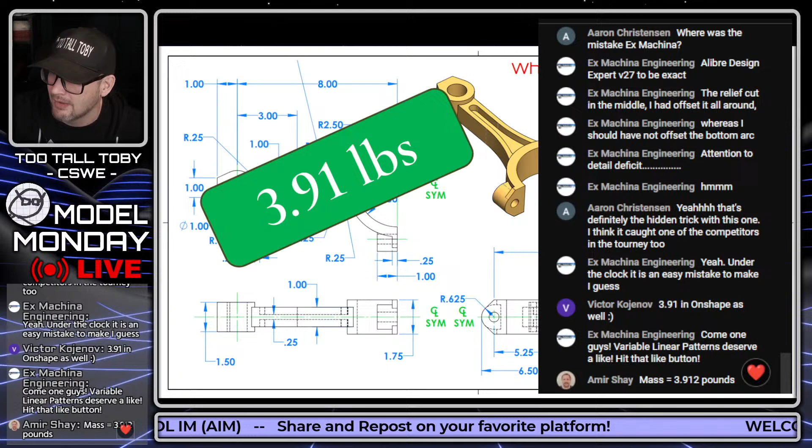So good game to Aaron C, earning a point. Good game to Victor K, earning a point. Congratulations to our winners for earning those points this week.